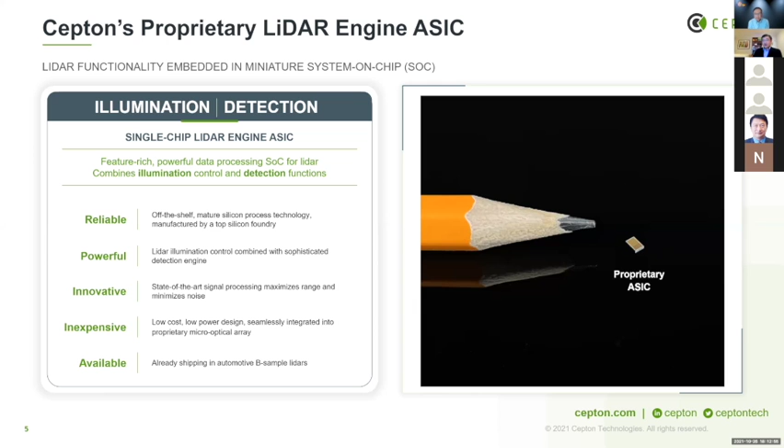But after all, after 5 years into this very hot, almost melting pot of a LiDAR competitive landscape, it is no longer the technology that has the speaking power. I can pound my chest and tell you all I want how great a technology we have invented, this or that. It doesn't really matter. These days it's the commercial success, the design wins that get you the final validation of the technology. It's not about the technology itself. It's really the business engagement, what kind of commercial traction, what kind of design wins you have.

And for us, even from the beginning, we didn't deviate from our focus. All these OEM engagements are really our focus in trying to get into level 2+. And of course, auto OEM B, I can proudly say, is General Motors. If there's any takeaway from today's conversation, it's that Cepton Technologies has the largest design win in the ADAS industry for LiDAR. And that is starting from 2023. It's going to start with three platforms on 4 models.

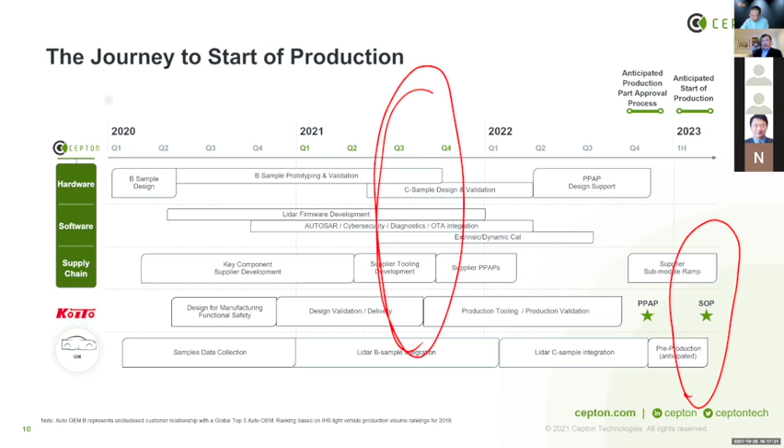We kind of buried our head and hid this secret very well for the past almost 2 years, working on the execution of the program. Like I mentioned a little earlier, this design win was actually meant to be SOP, start of production, in 2023. And we started well over 2 years ago. We're actually, let me see, right at this point. So as you can see from this chart, we're actually delivering C samples, getting ready for the PPAP.

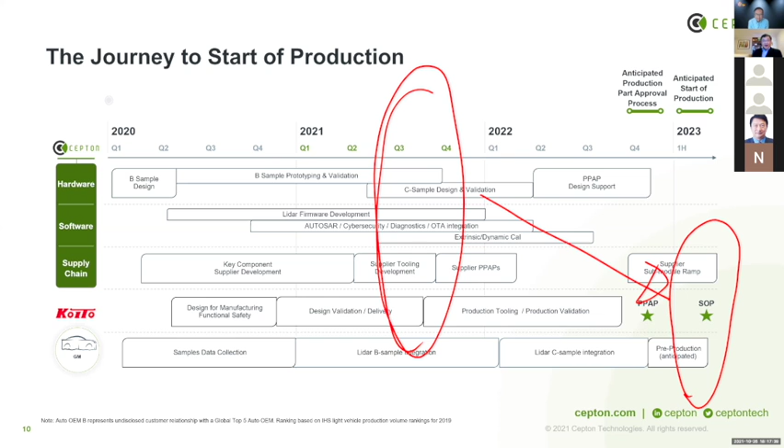So right now, it's really just a clear shot for Koito to beef up their production line and start to crank out. I'll use a GM's term, we'll start to print out these LiDARs from their production line. I guess I'll skip this slide just for the sake of time. It's important to have a tier 1 for anybody working in the auto industry. I have certainly learned to try not to be a tier 1 company, just even from the liability perspective.

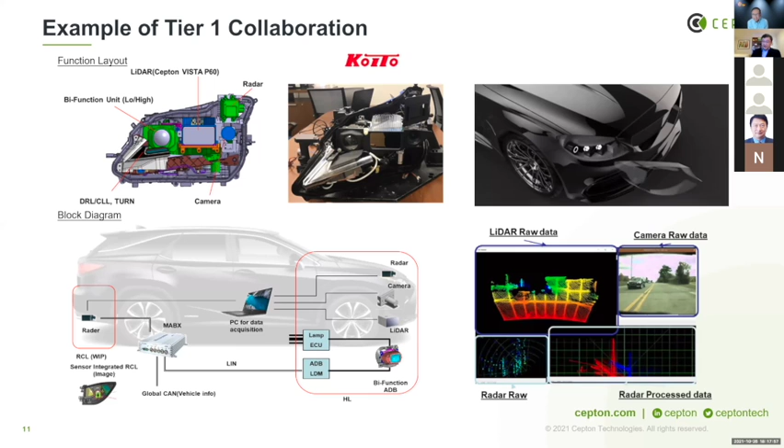But skipping this slide, Cepton Technologies certainly now has a solid place in LiDAR hardware platform. We are also very active in creating the automotive software as well as the perception software associated with our platform. After all, the name Cepton itself, CEPT, is actually borrowed from the word perception, and ON being the Latin ending of an element. You see photon, electron, atom. So Cepton really means an element of perception.

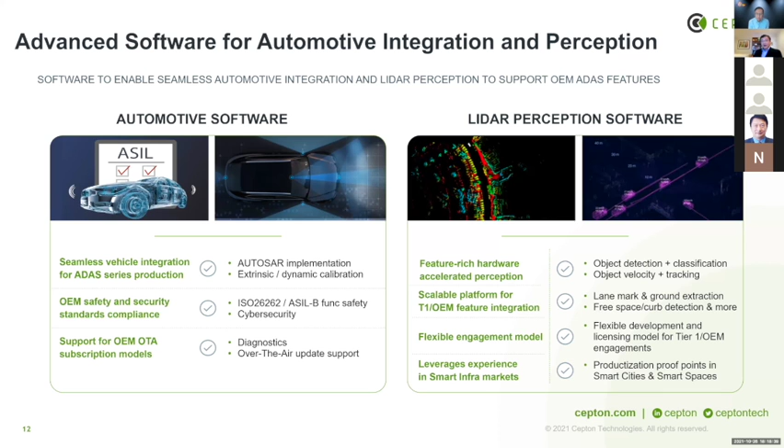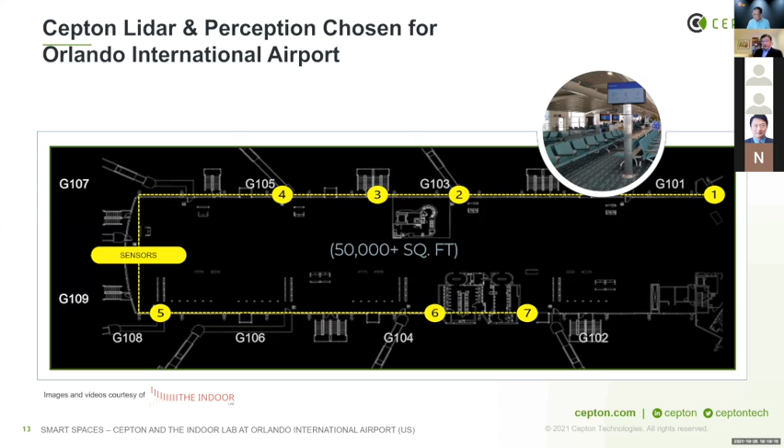So we're certainly not going to forget there's a huge software element of the perception. Indeed, we have already started working on both the auto and non-auto portion. And this is very much an example of a non-auto application. Cepton LiDAR and perception was chosen for a monitoring system at Orlando International Airport. This is a big international airport. At this terminal, 7 Cepton LiDARs were installed to replace 24 of their existing cameras, together with our Helius perception software.

You immediately realize how you can optimize it, or simply send the cleaning crew to the strategic location to save some janitorial costs. So all this is very valuable information that Cepton LiDAR and its perception software is capable of delivering at this terminal. Well, in this unfortunate day and age where we have the social distancing need, it is just a switch of the software configuration to turn this place into a social distancing monitor.

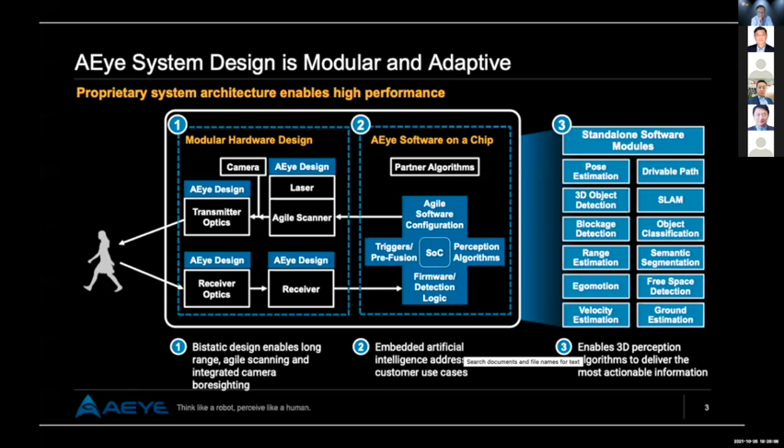One of the unique features is we are using a 1550 nanometer fiber laser, which is eye safe and can also provide several kilowatts peak power, which has the advantage of high peak power over 900 nanometer laser, which is limited by eye safety. In addition, nowadays the fiber lasers are qualifiable in automobile grade operation temperature and also other related shock vibration tough environments.

Another feature of our design is we're using a MEMS scanner. The MEMS scanner provides agile scanning capability. You can either scan the whole field of view, or you can only scan a very small sector of the interesting subjects with much higher density to identify distant objects. Later on, we'll show you the examples.

In addition to that, we have a very good receiver module which can detect signals from 1 centimeter to 1,000 meters. And also each pixel in the receiver array is independent or isolated, so we get very good signal to noise ratio and also very good quality of point cloud data.

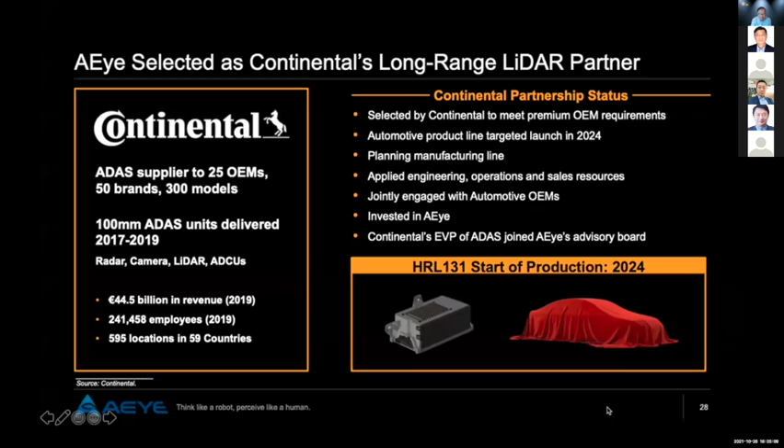Before my presentation closure, I would like to show you a video clip showing our LiDAR system has achieved 1,000 meter range in rain or behind windshield glass. Thank you for your attention. Ryan, would you please run the video?

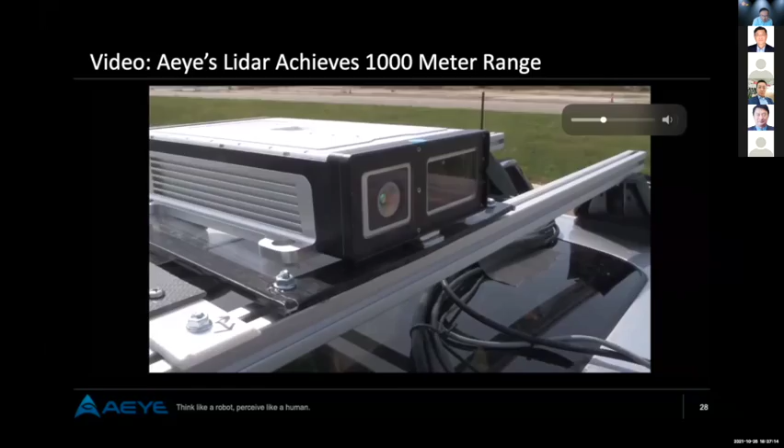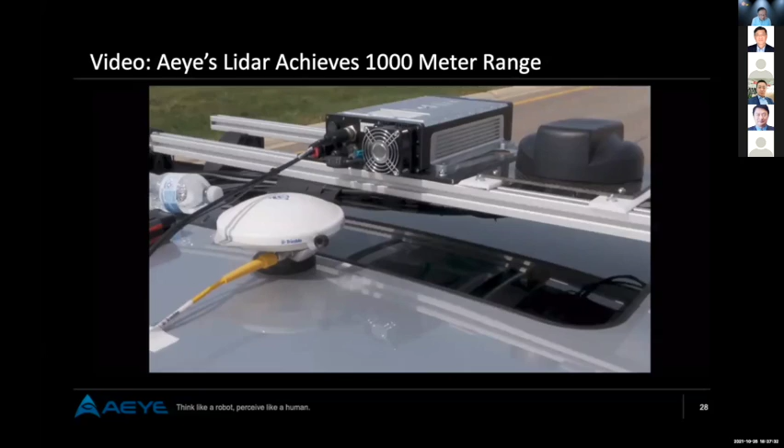Got a car at 1,000 meters, and we're going to go ahead and add a second car with a different dimension to it to get a feel for how many detections we get on each of the two different cars. We're also going to add this water truck here, and this water truck is going to spray in the middle of the environment. That will allow us to show we're shooting both through a windshield and through the water, and still seeing two different cars of different shapes and sizes at a little over 1,000 meters.

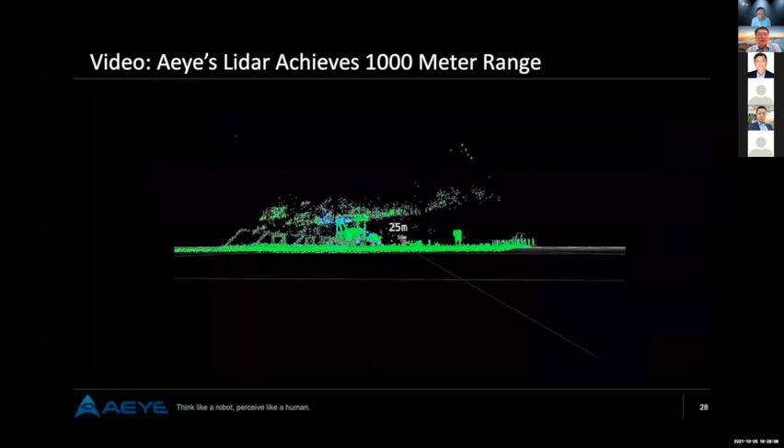Yeah, thank you. Great, that's a good show. Thank you, Ben. Okay, thank you, Ben.

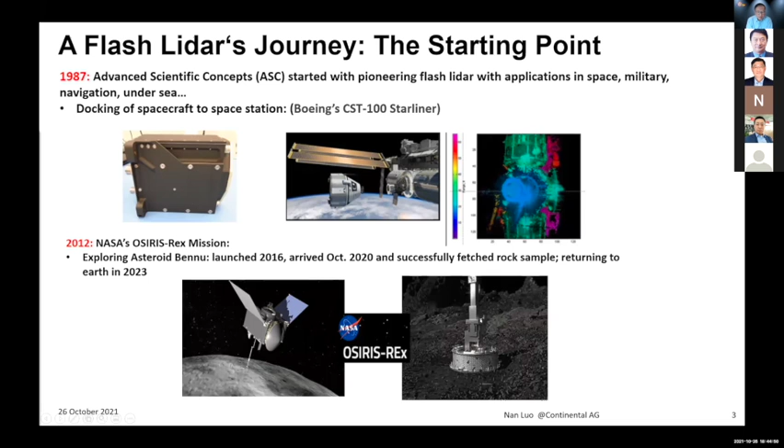So you can see these two pictures here. The first one is from year 2020, when this spacecraft reached the asteroid - you can see that robotic hand approach Bennu. The second one, you can see the collector sampling the rocks from Bennu. This distance is also measured by this flash LiDAR.

So the new mission is that when Continental acquired this small startup, their goal is to commercialize this flash LiDAR for autonomous driving.

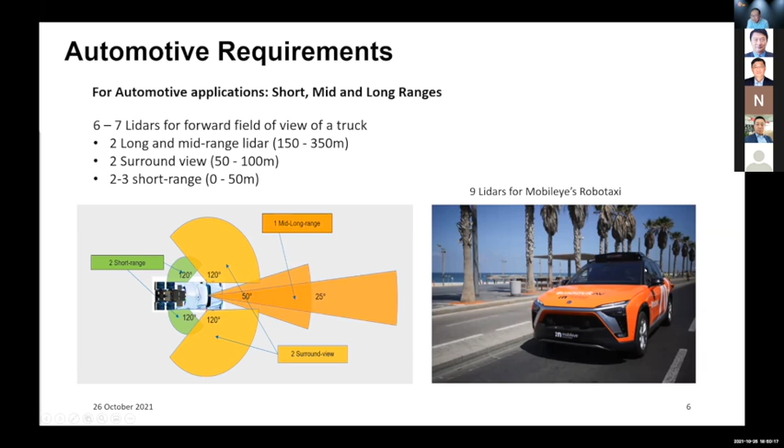But also, you know Mobileye - they are right now building their robot taxi. Actually, they have installed 9 LiDARs in this robot taxi.

Actually, Doctor, you asked me to compare the automotive requirements versus telecom. I think this is definitely an interesting topic here, because I know one third of the LiDAR companies actually came from the telecom industry. So they know transmitter or receiver very well. But for automotive, I think the major difference is that you have transmitter, receiver, but you also have this field of view, meaning you have to have a scanning beam, or you have to have a beam steering kind of methodology. So that's a major difference.

Then there will be a definite performance side comparison here. So I'm just pointing out here the temperature range. For telecom, typically you go from -40 to 85 degrees C. But for automotive grade, typically they ask the same, or it could be even higher. In some applications, they're asking for 100 or 105 degrees.

Also they ask for shock and vibration resistance, right? Typically there will be testing from 5 Hz to 2 kilohertz sweeping, which means if you use MEMS scanning, your mirror has to have its resonant frequencies out of this range. Otherwise, it's kind of hard for you to pass this test. So this is actually one of the advantages that Ben just mentioned, that their MEMS mirror is really outside of this range.

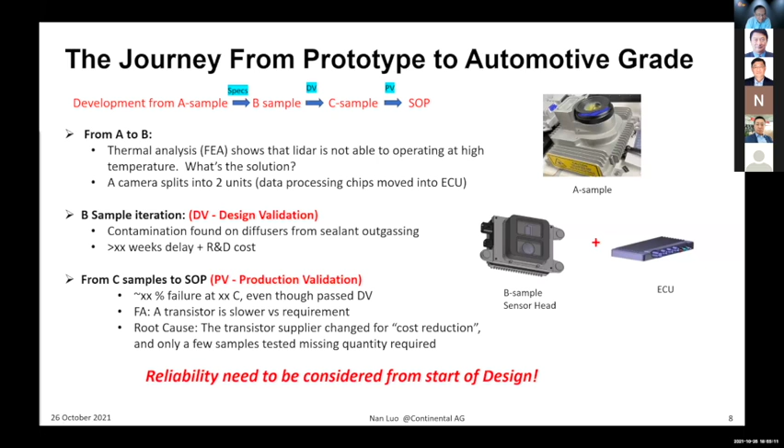Hey, Nan, sorry to interrupt. On my clock, you've got less than a minute. Oh, really? Okay, I'll try to speed up. Thank you. Sure. I'm going to skip this a little bit.

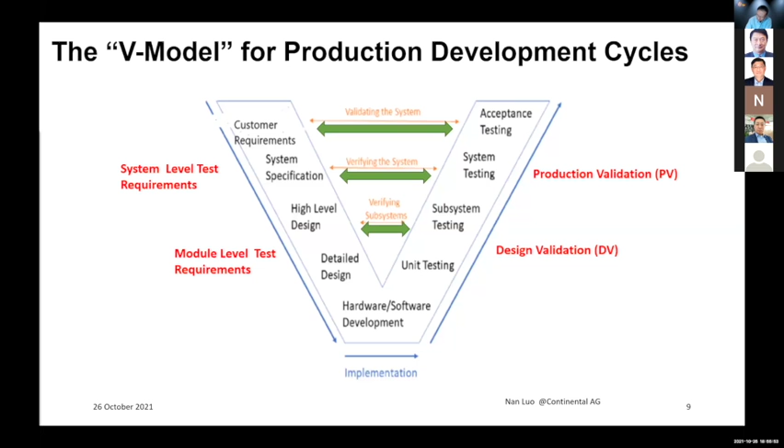Okay, so on this journey, finally we got into SOP, and our successful ending is that these 3 short-range LiDARs have been installed on the next Toyota Lexus LS, and also another model, the Mirai. So these 3 LiDARs, you can see, are on each side of the Lexus, and also one on the rear side. So these 3 short-range LiDARs basically cover the back field of view of this car, and there is another one, a long-range one, in the front. So yeah.

So basically, I'm going to end my talk here. The main lesson we have learned is that we really have to follow this V model, and we also have to think about it the horizontal way. When you start to design your product, you have to think about the testing side, and the design engineers have to understand the testing and the reliability requirements. So that will help a lot in speeding up these production cycles.

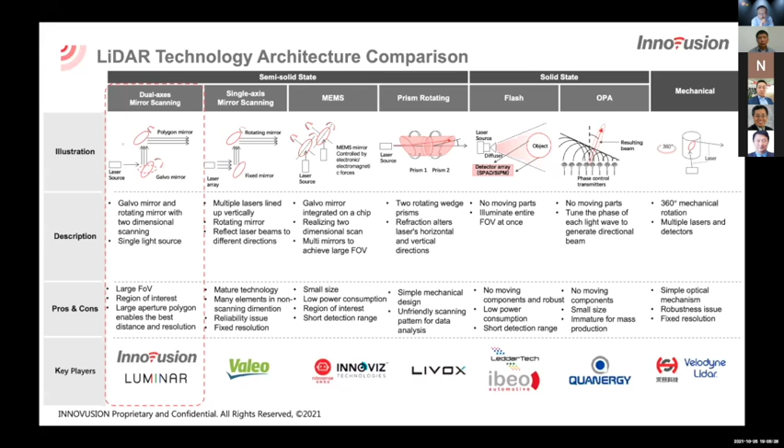Yeah. So next slide, right? So I think for LiDAR, the application determines the solution or the technology you apply. We divided it simply into two categories. One is long range, for the autonomous driving application. We believe if you want to be safe enough, you need at least 200 meters with reasonable resolution and field of view. So from that perspective, we believe 1550 is the only solution.

And also, we don't think that's the only application of LiDAR. If you want something like vehicle blind spot, just like Nan mentioned, you have some short range or some middle range. I think 905 is still an alternative from an economic, power consumption and size point of view. So I don't think we directly compete with each other because we are targeting different applications and different markets. So at this moment, we focus on 1550.

And why we chose 1550, I think Ben explained a lot. So basically, there is a higher eye safety limit and better linear APD, so it has an adaptive dynamic range. And we use full waveform analysis, so we can handle more complicated situations.

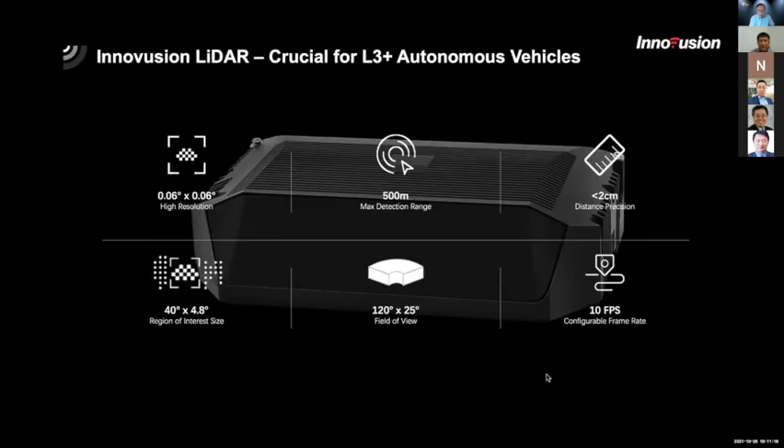So here is some show. I believe it's show time. We have some videos that show the superior performance. And for this one, Rang, can you replay? Yes. Basically, you can see the lettering from the vehicle, and also you can see the small box from the very far end. And this one is a big differentiator. Lots of people, when they see this one, are surprised and kind of astonished.

And there is another video side by side with this one. I'm afraid to show it because that's the competitors' performance. Basically, they cannot see anything beyond 100 meters. They don't even have good resolution. So this is the lettering. And next one, please, right?

So basically, this is the demonstration of the pedestrian at 125 meters. So yeah, you can play the video. You can see it's very, very recognizable. It's a person, and also you can distinguish the legs and also the movement. This is very, very useful and enriches the information for perception. And that's why we emphasize only long range is not enough. The high resolution is a must associated with this long range.

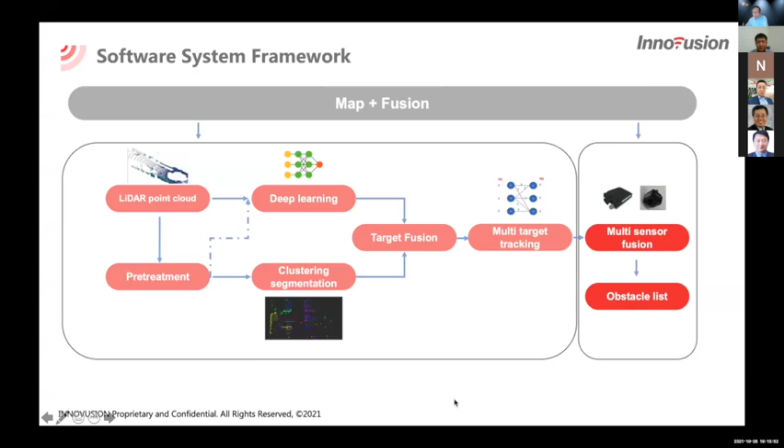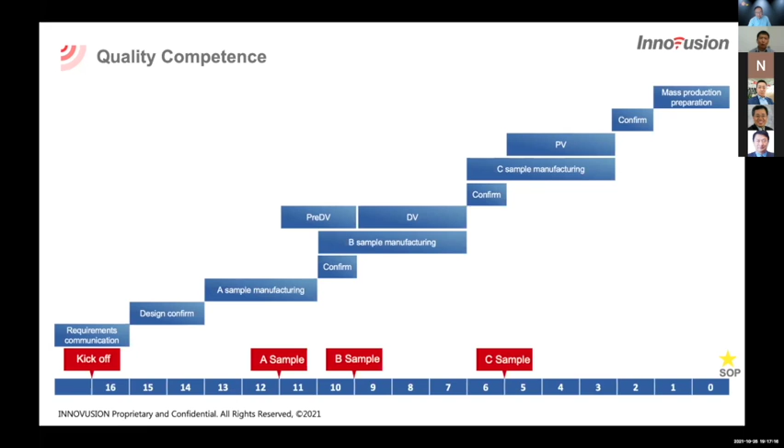And for NIO, I think for a LiDAR company, if you like the LiDAR company, you let them work with NIO. And if you hate a LiDAR company, you also let them work with NIO. So it's a very, very polarized condition, but we really enjoy it. So now we have the confidence when we face other customers or tier 1s and OEMs to say we really know what auto grade means. Yeah. Next slide.

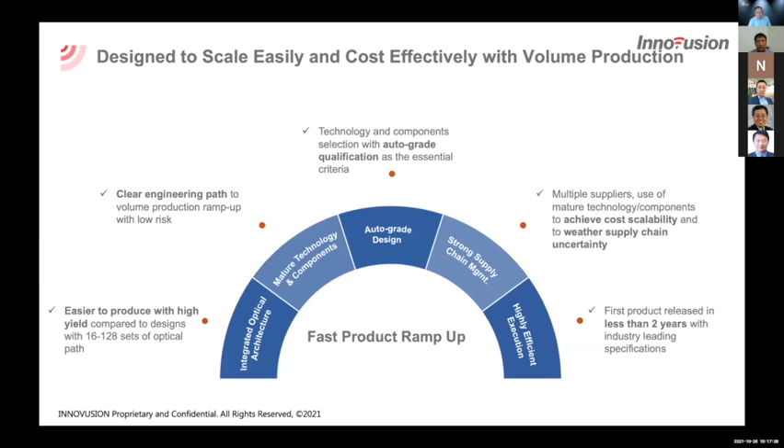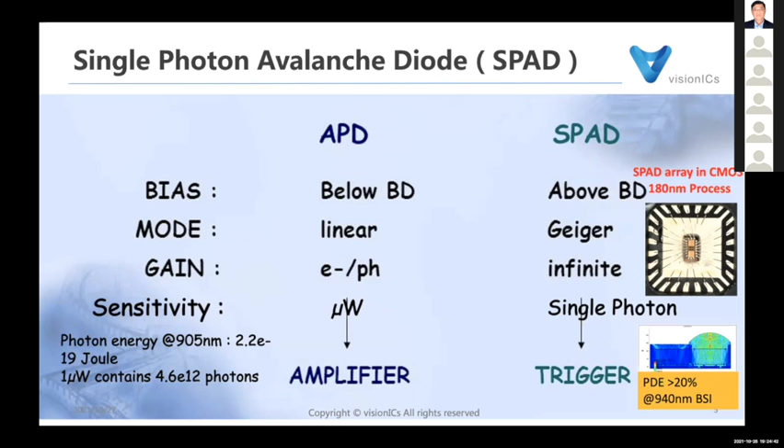There is a wide range of applications for DTOF, not just limited to vehicle LiDAR. For mobile, each phone could be equipped with a DTOF sensor in its Face ID, such as Apple's iPhone, and high-end Android phones use it for laser focusing for the back camera. Since 2020, Apple's iPad Pro was first equipped with a DTOF sensor on the back camera, called the LiDAR scanner. Then we see the iPhone 12 and 13 both equipped with a DTOF-based LiDAR scanner.

So for the self-driving car, SPAD DTOF is becoming a promising solution. Sony just released a SPAD DTOF depth sensor for self-driving LiDAR solutions this year. LiDAR startup Ouster acquired Sense Photonics to accelerate LiDAR development progress. Both of them focused on SPAD DTOF techniques before merging.

Besides mobile and autonomous driving, DTOF could also be used for many other applications, such as SLAM for AGV and sweep robots. In the future we will see AR/VR goggles use a DTOF sensor to sense the environment and recognize gestures.

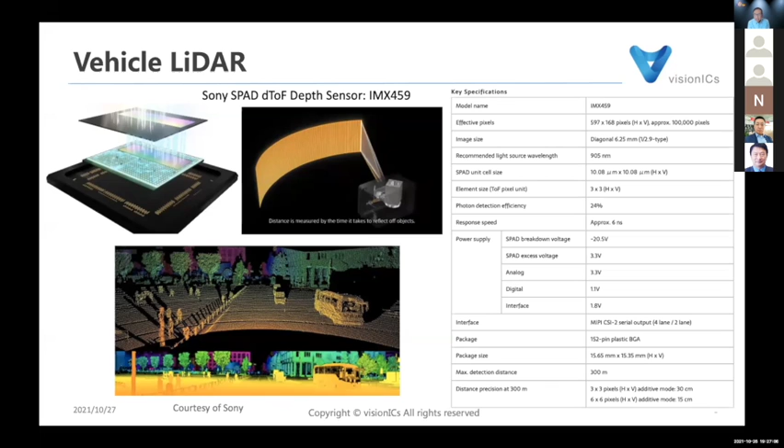Later this year, Sony released the SPAD DTOF depth sensor for autonomous driving. It has approximately 100,000 SPAD pixels with 10 micrometer pixel pitch, and could support 3x3 binning mode. The PDP is 24% at a breakdown voltage of about 20 volts. With mechanical scanning and sufficient laser power, it could reach 300 meters detection range.

After discussing the leading companies' progress on the SPAD DTOF sensor, I would like to introduce visionICs' SPAD DTOF products. For 1D DTOF, the 4300 is a long-range DTOF sensor with maximum distance of 50 meters for SLAM applications. The 5300 is a short-range DTOF sensor, which could support 4 meters for camera laser distance auto-focusing.

For 3D products, VisionIC released 3 3D sensors with different resolutions. They are based on the FSI process. The SPAD array and the back-end logic circuits are more or less integrated into one die. All depth process engine and the MIPI interface are included, so it outputs the 3D cloud points directly without the need of an external imaging signal processor.

Lastly, we're going to release our BSI 3D stacking DTOF sensor next year.

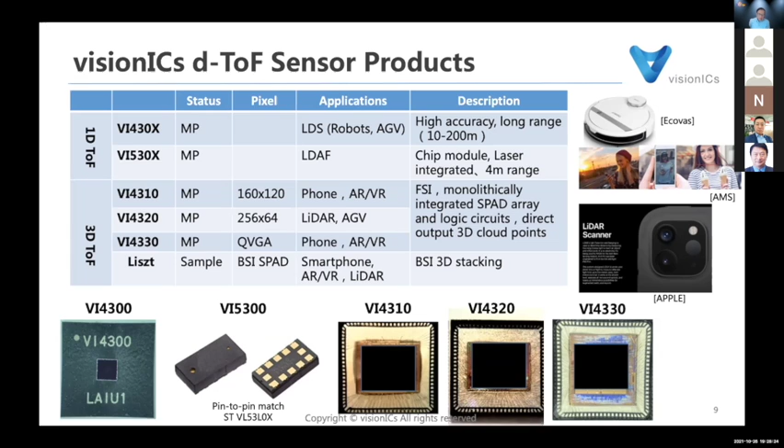For the long-range DTOF sensor 4300, the longest range is about 50 meters with 1% accuracy. Depth resolution is about 1.5 centimeters with a maximum frame rate of 7.2 kilohertz. This sensor more or less integrates the SPAD array, quenching reset, time-to-digital converter, histogram, algorithm, MCU, RAM, and many interfaces into one die. Compared to the discrete APD-based DTOF solution, the 4300 burns much less power with higher performance and low cost.

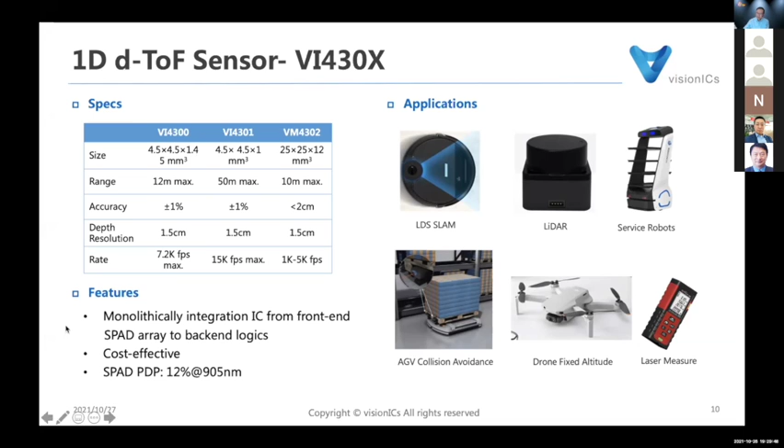The SPAD PDP at the 905 nanometer is about 12%. We are developing the next generation of the 4300, trying to reach 200 meters outdoors at a 100 kilolux environment. The 4300 could be used for a variety of applications, such as LiDAR for vacuum robots, collision avoidance for AGV, drones flying at fixed altitude, and laser distance measurements.

For the short range DTOF 5300, the maximum range could support 4 meters. The blind zone is about 2.5 centimeters. Accuracy we could achieve 4%. The angle is about 25 degrees. The frame rate could support 90 hertz max. It's eye safety class 1. It's packaged in a SiP, with the VCSEL laser integrated.

It's pretty straightforward - it's actually just a chip module with a laser and a receiver. You just add some firmware, then it works for you. It could be used for camera lens distance autofocusing, collision avoidance such as sweep robots along the wall, and perception such as screen wake up for laptops and smart door locks. Besides, it could also be used for many other applications, such as liquid level detection and some industry automation applications.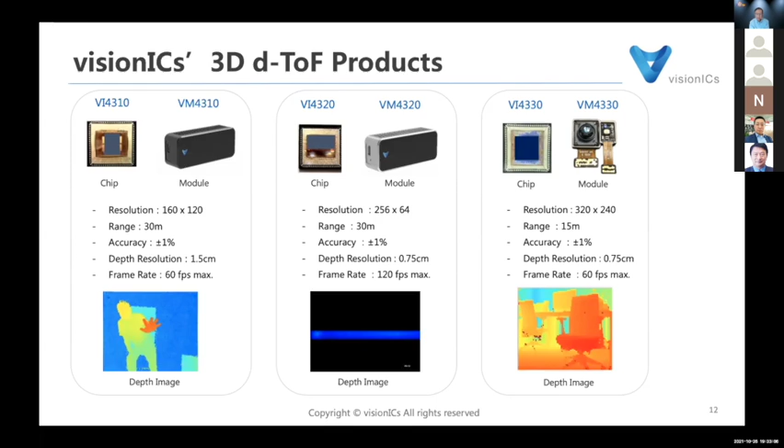So we also would like to work with other LiDAR companies, to see how visionICs could provide support for their LiDAR solutions. That's all of my talk today, thank you for listening. If there are any questions, we can discuss them in the Q&A window.

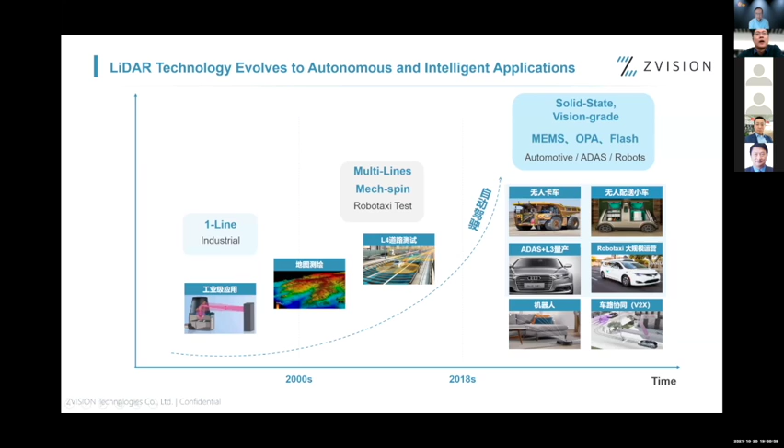So LiDAR has been booming into all kinds of technologies and solutions. From the scanning method, there's mechanical spinning, flash, and MEMS, and also some other new methods coming up. From the receiver side, we have array receiving with CMOS, APD, and SPAD receivers for high performance, and also coherent receiving with frequency modulated continuous wave transmitters.

We believe different technologies and solutions have different advantages. For mechanical spinning, the solution is very simple and it's much easier to achieve high performance, and this has helped the industry move from early stage lab-level road tests to industrial applications. But for the industry to ship hundreds of millions of LiDAR units, LiDAR will need a more robust, high reliability, lower cost solution. This is when solid state LiDAR came into the market, with flash, MEMS, and OPA competing in the industry to bring the best solution.

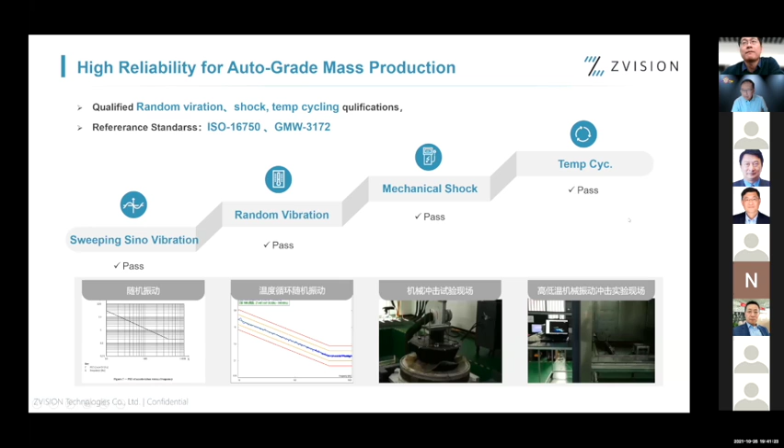Here is our introduction of the ZVision products. We have two series of products. One is the short range LiDAR ML-30S, which is the largest field of view blind spot LiDAR for current applications in the market. It has 140 degrees field of view horizontally and 70 degrees vertically, with 20 meters of detection range at 10% reflection. It has equivalent to 116 lines of scanning pattern, providing vehicles with very high precision and high resolution detection of the blind spot for the surrounding view.

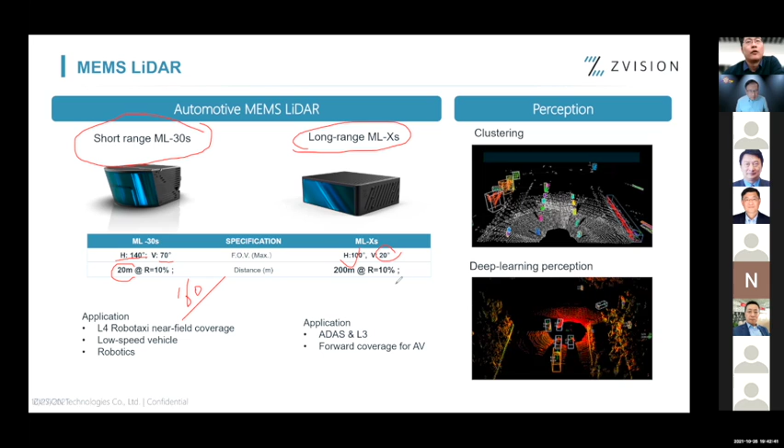For the long range LiDAR, we have the product ML-Xs, which has entered the B sample stage. It has 100 degrees field of view horizontally and 20 degrees vertically, with up to 200 meters detection range at 10% reflection. It also has 200 lines equivalent for high performance detection, and the vertical resolution is 600. This is a very high performance MEMS LiDAR so far in the world, and it targets to be SOP by end of next year.

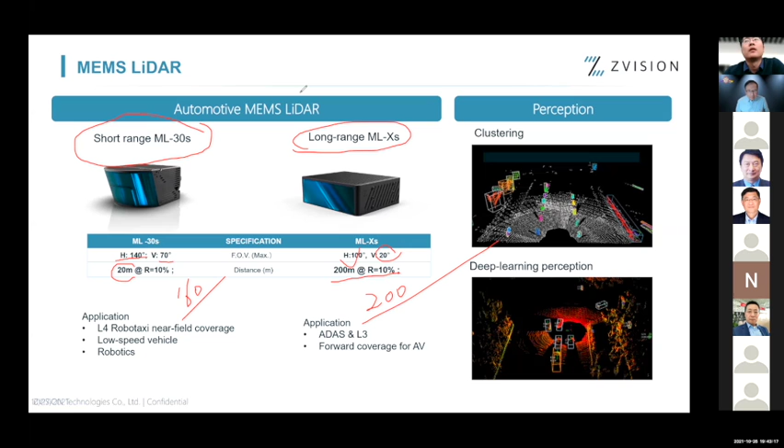Okay. Yeah. Oh, sorry. How to remove this?

This is our short range LiDAR with 140 degree field of view, 70 degrees vertical view, and 116 lines. It has already hundreds of design wins with our customers, both in China and abroad. Our first design win was with Inceptio last year, and we have another design win with JD, shipping thousands of units this year with Jingdong last mile delivery. We also have a design win for robotaxis with Mobileye.

This page shows a demo point cloud for our short range LiDAR. This is just a picture—anyone interested can reach out to me and we can share more information face to face. This is 300 by 160 lines of short range LiDAR, and it can very clearly show pedestrians, cones, and everything like side roads and vehicles, bicycles, motorcycles, cars, everything.

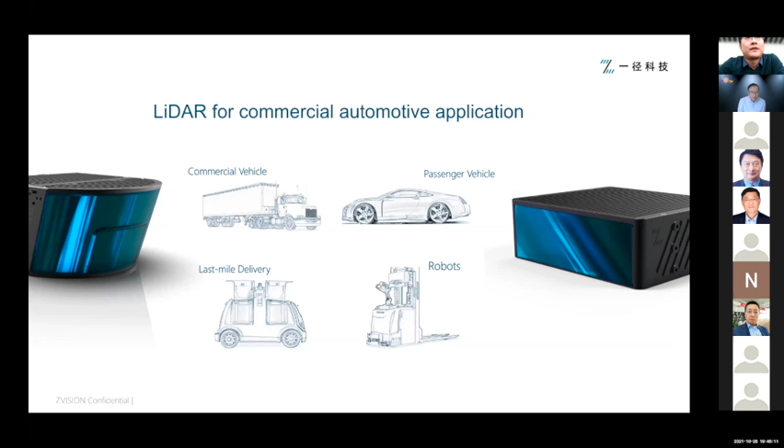Currently our LiDAR products are widely used in commercial vehicles, last mile delivery, and robots. We already have design wins with commercial vehicles like Inceptio, and also some other commercial vehicles in China. We also have one of the biggest POs in last mile delivery with Jingdong, and the third generation of Jingdong's delivery robots was just released a few days ago, installing 4 units of our ML30S LiDAR, with shipments of thousands of units this year.

We also have a design win with Mobileye, the robotaxi and ADAS solution supplier in the world. Mobileye is using 3 long-range LiDARs from Luminar, and 6 short-range LiDARs from ZVision. They released the total solution in Germany this year, just 2 months ago.

Here's a brief introduction of our company. ZVision was founded in November 2017. We are a 4-year-old company right now, and we believe we are a very young LiDAR company in the industry.

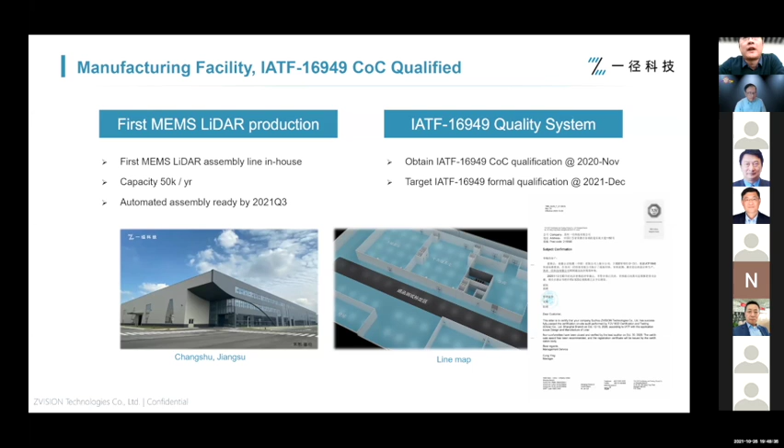Our facility is built in Changshu, and we have about 50K of production capacity every year by end of this year. We will be qualified for IATF 16949 by end of this year for mass production.

Thank you everyone. This is the introduction of ZVision. Anyone interested in MEMS LiDAR technology can reach out to me, and we can discuss more details later.